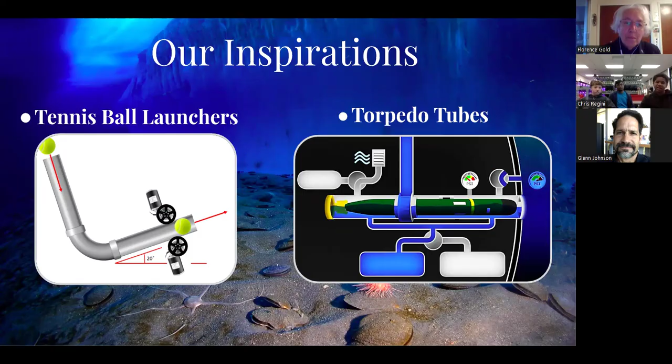Our inspiration is taken from tennis ball launchers and torpedoes, the way they launch out using wheels just to send it out and fly it out. Our first sketches were based on springs and airlock mechanisms, obviously based on the tubes of a torpedo. But we were quick to realize we couldn't use airlocks while in the spacecraft, so we had to brainstorm other ways of launching the can.

You already know the criteria, but just to sum it up, we have to launch the soup can off the edge of the table, and we can't exceed a certain speed.

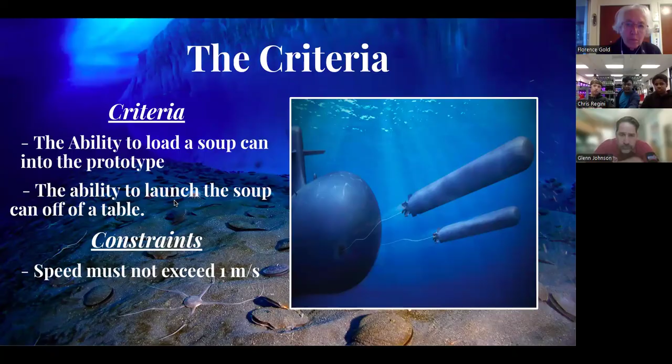All right, so the part you've all been waiting for, the pros and cons of our prototype. The best part is that we can launch it at a fairly regulated speed, not really exceeding 1 meter per second. And we're only using one motor for this, meaning power consumption will not be that high when we're using it. However, in the current state of our prototype, loading is not our best aspect. But as Nathan said earlier, a 3D part is currently being printed for our prototype, which will allow the loading mechanism to be more consistent.

Speaking of our 3D part, let me present it to you all in a CAD state. So this is meant to be a container which we can load the can from the top, we can activate our prototype, and it will launch from the side, as you can see here. The divots on the wheel on the side are meant to be holes so that the wheels, which you will see in a second, will end up launching.

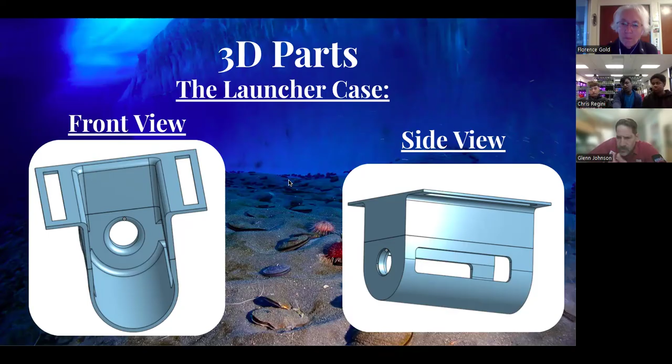So without further ado, I present our current prototype, which implements the inspirations of our torpedo tube and our tennis ball launchers into a method where we can launch our empty soup can off a table. And without further ado, here it is.

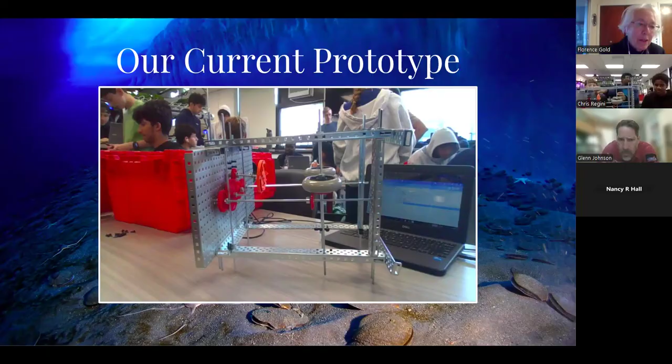Hi Nancy. Hey, so they're going to demonstrate their trash ejector. Got here just in time to see the demonstration. I had a phone call and couldn't get out of it. Not a problem, sit here. Okay, let me pin them so I can see it. Oh yeah, that's a good idea. Alright, show me what you think.

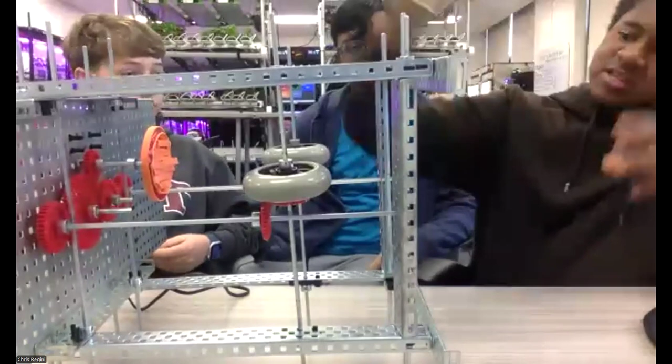How does this get loaded, gentlemen? So this will be loaded from the top down into here. Very good. And then we have a button at the back here. When we press it, it will activate these wheels and cause everything to start running.

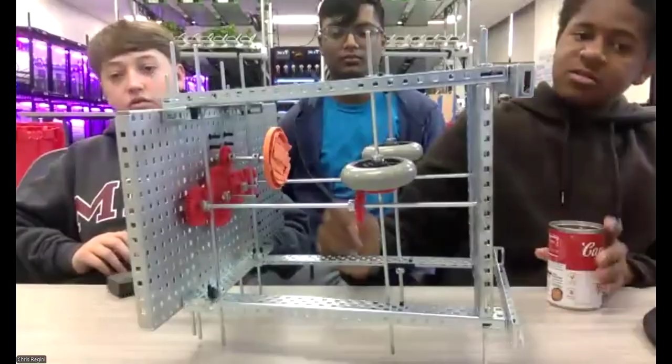So did I see that the pusher plate is rotating? Is that correct? Yes, the orange part is rotating. Very good. So when that rotates, look at that. So you guys are using one motor to spin the can as well as spin the wheels, is that correct? Yeah. Very smart. Okay, keep going.

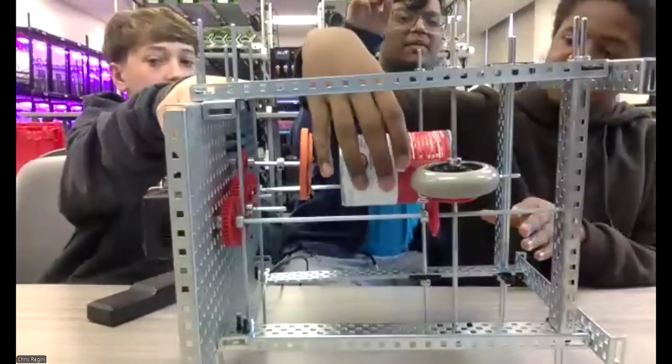Let me see it, can you throw it right now or not? Yes, we can. Oh excellent. Oh I see it, yeah, very good. It would be preloaded, but we have 3D parts being printed for that which isn't finished at the time of this presentation. That's fun. Nice.

Now, one question for you: does the spinning of the pusher plate give it any real rotational motion as it exits? Well, right now, because we don't have the holder to hold the can, it can't really serve a purpose. But once that's printed, it should allow the can to spin and launch out at the same time. I'm curious how that's going to work. Now, you know it's not required for it to spin, but I like that you're working on it.

Just as a thought, do you think there's any chance you could get any of that spin from the wheels themselves? I feel like that is possible, and it will definitely be hard for us. How do you think you would do it? I feel like the only way we would do that is we put the wheels on an angle. That's what I was thinking too. I see why it would be difficult for yours because you're trying to get all the motion from that one motor. But I like how you're doing this.

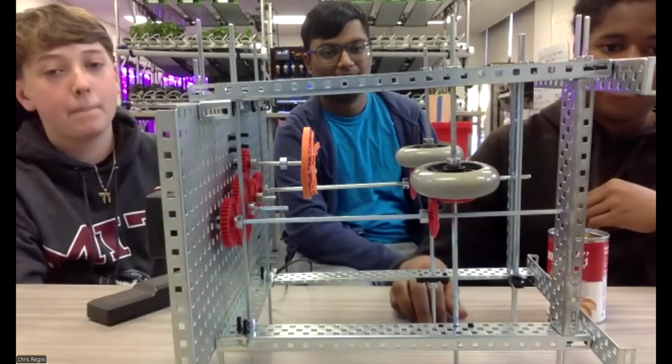I don't have any suggestions, but I think you guys are on a really good path. This looks great, team. So you're going to insert that 3D printed piece and reassemble around it. Are you going to have some kind of container on the outside for pressure, to keep from losing air? Our major focus at the moment isn't really the hatch, more so getting our can to launch, so we haven't really considered airlocks, hatches, that sort of stuff. Our main priority right now is just getting the can to launch. And I think that that's great.

Okay, that sounds terrific. I'm going to let Nancy ask some questions here. No, it looks real neat and stuff. I guess the one question I have is, since it's launching and following that curvature, do you guys have a way of measuring the distance that it travels?

You may be thinking to measure the distance it travels using a video and measure it. Yeah, because one of the things Glenn says is he doesn't want it to go more than one meter per second. So if you have a video - I told the other team you could put tape on the ground, see where it falls, calculate how long it travels, the distance, and then using simple math you can get the velocity it travels. So I definitely recommend you take video of it, so you can see how far it goes.

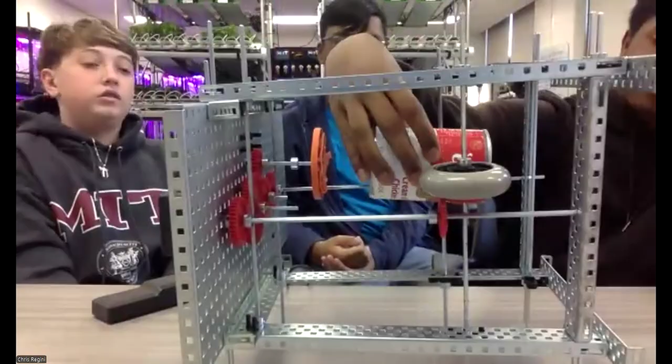Okay, another question for you. When the can is in there, how much are the wheels squeezing the can? We made it so that it doesn't squeeze too much so that it can't exit, but we also made it so that it can go a little bit outside and adapt.

Give it a 90-degree turn. Okay, so... oh, so we made it so that it goes in and out. Yeah, let me show it that way. Oh, very smart. I like how you've done that.

Part of what I was thinking about was that right now you're dealing with an empty can, and so I thought maybe it could be pinching the can, and that wouldn't be possible when it was full. But I think that you guys have it arranged in a way that's really smart.

Okay, I look forward to seeing how you do that exterior hatch. The fact that you guys already have some experience with gears and things like that, I think that's going to help you with deciding how you want that door to open, right? Because from inside, you can imagine, well, there's 3 different types of door, right? Here it is. So imagine I can have a door that opens like this.

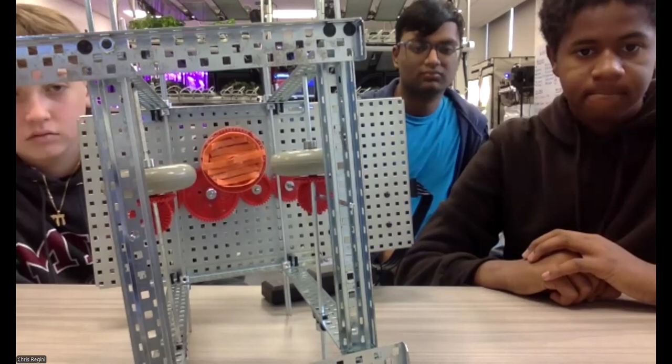I can have a door that opens like this, and I can have a door that opens this way, right? And so using some kind of gearing for each of those is not that complicated, especially if you've already got a handful of gears to play with. So consider, if you've got it like this, you're looking at a hinge. The pin for your hinge can become an axle for rotation. Does that make sense? So I think you guys have a lot of options with how you're doing this.

Excellent job, team. Thank you so much. Do you have any questions for us? Um, no, not precisely. Okay, what do you think your next step is?

I think our next step is to attach the loading mechanism and test it to make sure it's fully functional and doesn't cause any problems. And then next, we may just solve the opening the door mechanism, how to open the exterior door. I think that's a great process.

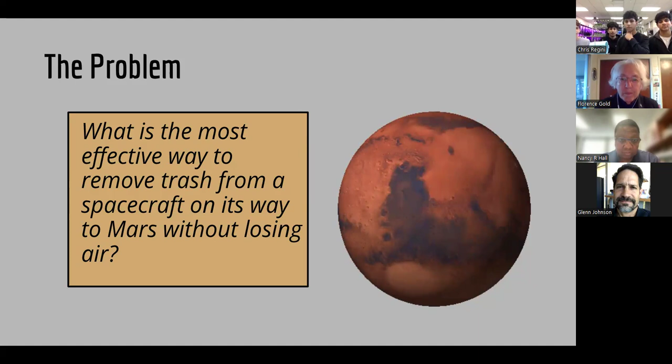We researched a little bit about football launchers and baseball launchers for inspiration on our tubule mechanism, where the wheels rotate in opposite directions to shoot our can.

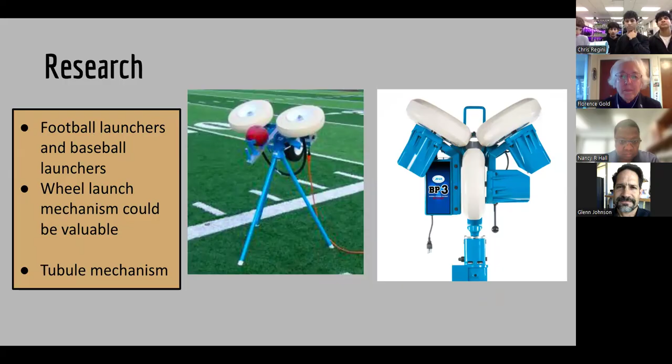Here's some primitive sketches we drew at the beginning of our project to brainstorm. We originally imagined a tube with a piston that would push the can into angled wheels for a spiral, and we wanted it to be fully automated, where it would just be a button press that activates everything in order.

We also had some other ideas, which we did not draw, which was a spring-loaded mechanism that would store potential energy and release it, and a piston-powered mechanism, which would be really fast.

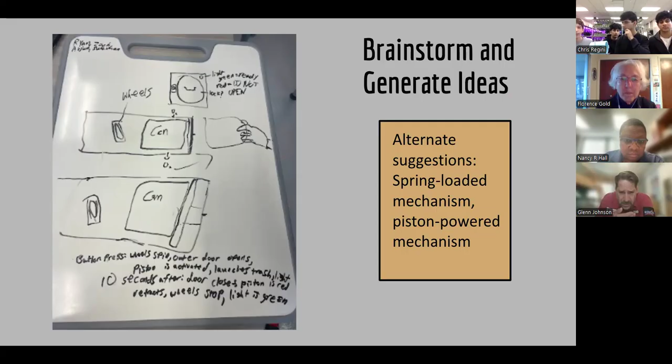Here's an additional sketch we drew showing how an astronaut would put the can into the tube and close the door. On the back of the door, we imagined a piston attached to a plate that would push the can into the tube, into the wheels. A problem we imagined was where we'd put the mechanism for the piston, because you don't want a lot of weight on the actual door itself that would make it unstable.

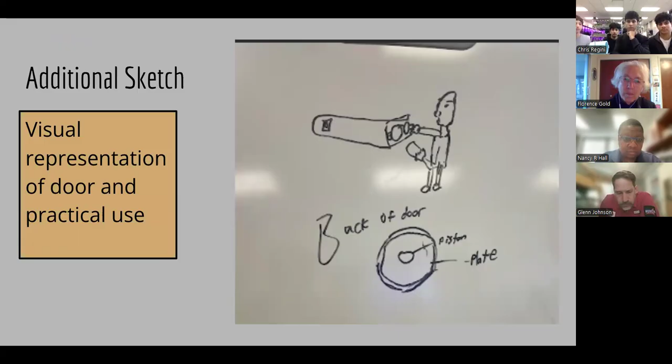Feel free also to use the cursor to point out parts in the picture if you want. So some of the criteria and constraints: the mechanism must not launch off faster than 1 meter per second to prevent denting, and the mechanism should be a simple design. The mechanism must have some kind of handle/release for the astronauts to be able to release the trash effectively, and the mechanism must be energy efficient, as energy is finite and valuable in space.

Some of the constraints are that the mechanism should not be complex and should not use too much material, as we were trying to make this as cheap as possible. And the mechanism cannot be heavy, because the heavier the mechanism, the more expensive it is to launch it to space.

Some of the designs and solutions we were thinking about: a spring-loaded mechanism due to the powerful launch. However, at the end, we determined this would be too fragile for our final project. We also looked at the wheel-powered mechanism, and we determined this would have a fast launch, which was better for our goals. However, this would be more complex, but with the way we built it as simple as possible. So our overall choice is to use the wheel-powered launch.

This is our current prototype. It's a 2-wheel mechanism, and each wheel is controlled by its own motor. The motor is connected to the wheel using a gearbox with a 3-to-1 gear ratio, in order to make the wheels spin a lot faster than the motor is actually spinning.

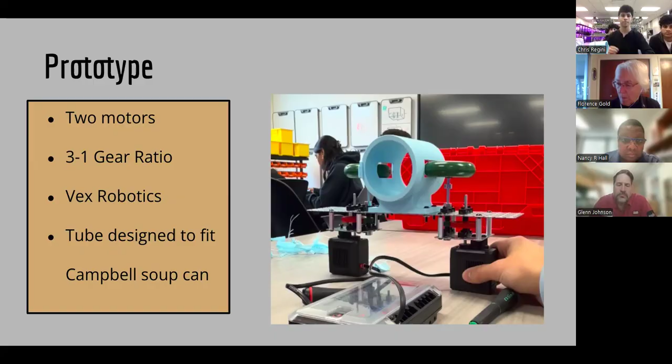This is the newer design we're working on implementing in the future. We will extend the tube, and we'll also have an L bracket connected to a drive shaft, which will be connected to a servo module. The servo module will spin the drive shaft, so the L bracket will revolve and push the can into the wheels to shoot it out. We're also working on developing some sort of a door, although we don't have much progress on that yet.

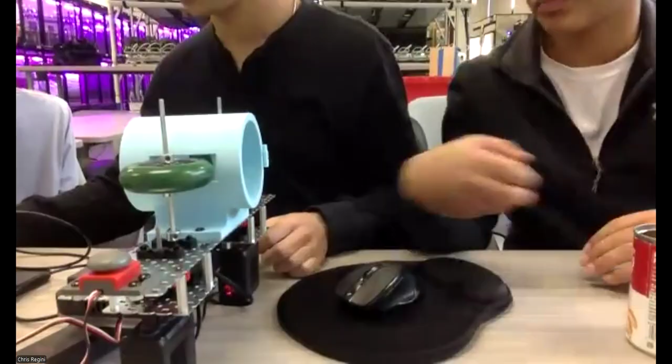The can would just be placed right in the tube, and the tube makes sure that the can is launched straight and direct. Our battery is over here, and our brain is right there.

We also have something that you didn't see on the slide deck. We added a button to turn the wheels on and off. I will show you how it works.

Whoa. Okay, that looks great.

Okay, now, I see that you've got two motors. I'm guessing you had to gear them down a little bit so they weren't spinning too fast. Is that right? Yeah, okay.

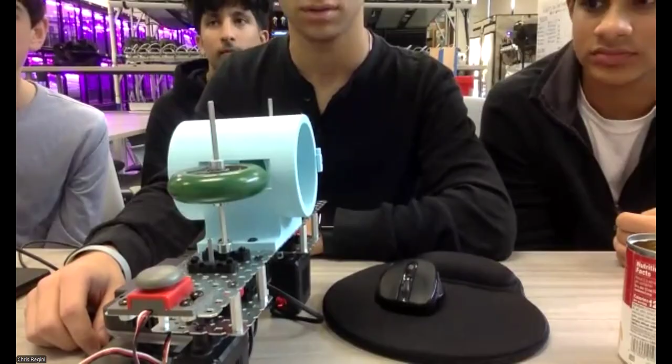What happens if one of the motors doesn't go, or isn't powered? Does it still go out pretty much the same, or not? Both of the wheels are spinning, and if one wheel stops spinning, the other wheel will spin in the same direction to launch the can out. So although it might launch with less power, it still will launch out.

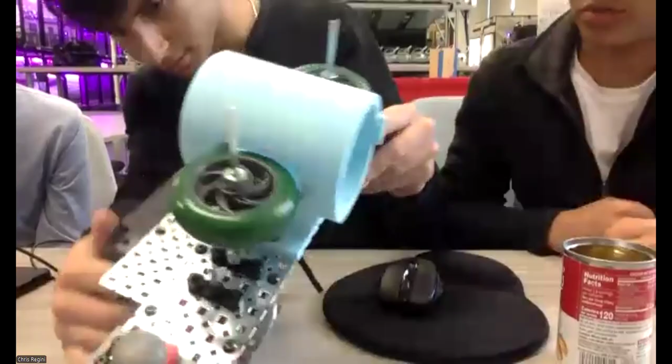So we're gonna unplug one and see how it works, because we've actually never tried it. It just won't go with as much pressure. Oh, it actually gets stuck. Does it jam? Yeah, it gets jammed.

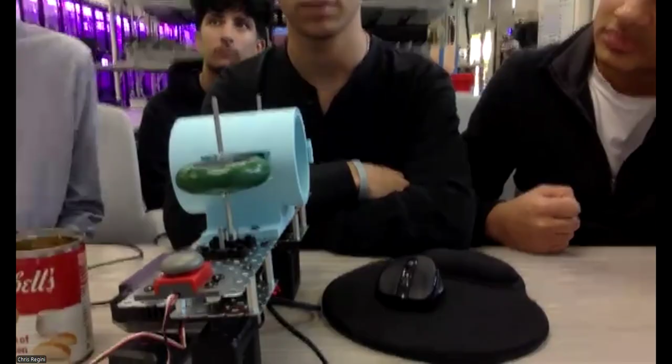Okay, now that's not all bad, it's something to think about, right? The other thing I was curious about is that by having two motors, it's possible that one could spin a little bit faster than the other. So that's something to think about. You might do a little experimentation to find out how that plays out, because it's hard to have two motors spinning at exactly the same rate—there are all kinds of little factors that could cause a difference.

Now, I also saw that you were planning for it to be a little bit longer of a tube. Can you explain a little more about how you were planning for that to happen?

So we're gonna 3D print the design. We're gonna extend this, but not include the holes for the wheels, obviously. And then we will include a smaller hole where the L bracket will go, that pushes the can into the wheels. It'll basically use some sort of adhesive to glue it or attach it here.

So I'm not sure I quite understand—you insert it, but how is it going to move forward to get into the wheels? You mentioned an L bracket, but I didn't see how that L bracket was getting its motion. I was wondering too, is that L bracket designed to move it?

It'll be connected to a servo module connected to the brain. So when you press the button, the servo module will spin, which spins the drive shaft right here, and then the bracket attached to the drive shaft will revolve around it, go into the tube, and push the can.

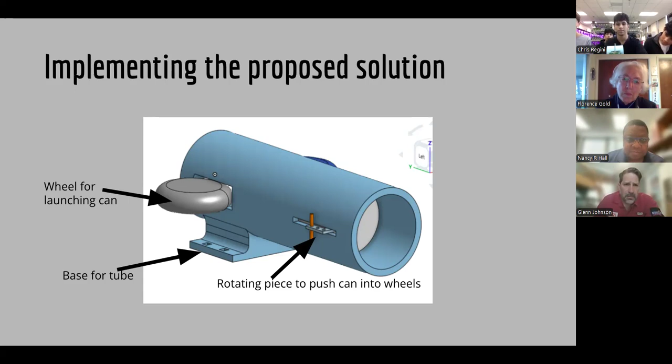Okay, I like your style with this. I think this is a great idea. Have you been thinking about your hatches, your hatch inside and your hatch outside yet? We haven't got so much into that, but we will work on that in the coming weeks.

Okay, so for example, I just got one big pipe here. So imagine you could have at least 3 different doors for this, right? You can have one that opens like a regular door at your house, one that rotates up, and one that slides open.

Part of what I'm thinking about is that when I was a kid, we didn't have automatic windows on our cars. You had hand cranks and you would crank it up and crank it down. Remember, you don't have to have electrical for everything. Some things you can do that same way. My reason for bringing this up is you may not have a whole bunch of motors to throw at this, but you can have a couple of hand cranks and some gears and things like that, and that'll keep it pretty simple.

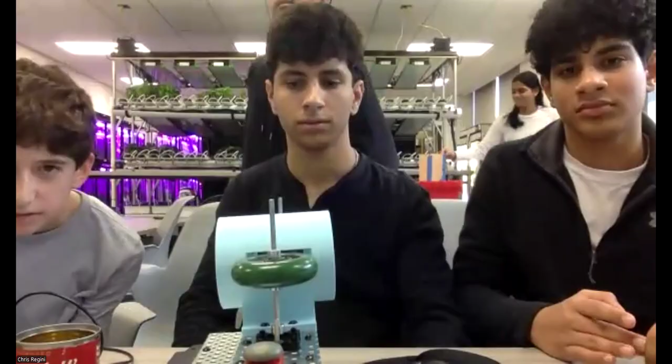You guys can take the can too. I'm just going to slide in and get stuff set up for you, girls, before we get going.

I appreciate you keeping us on schedule there. That's awesome. It's more about just making sure I get the kids over to where they got to go, you know? Yeah, that's good. Let's see here.

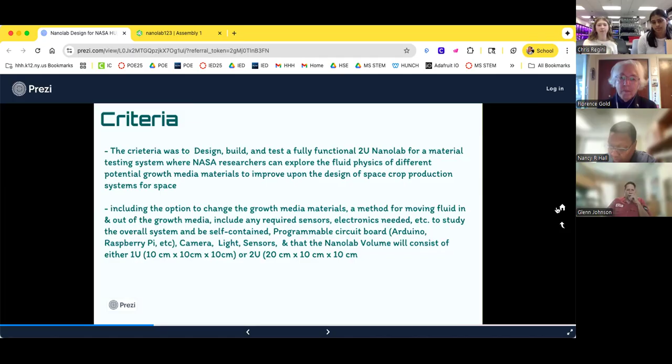So we did a lot of research. We found several existing commercial systems that address similar needs, including the passive orbital nutrient delivery system, the advanced plant habitat, veggie, and plant water management soil. These systems are currently used to deliver water and nutrients efficiently to growing media without conflicting with the challenges of a low-gravity environment. Having those sources to get inspiration from was really helpful.

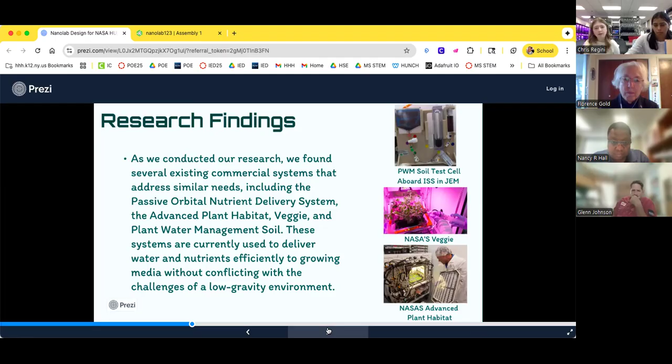Because our criteria prohibited any electrical or mechanical mechanisms, we had to ensure throughout our design process that the system required minimal manual labor while still allowing astronauts to efficiently grow crops in space. We did use sensors though, which come underneath the criteria for the mechanism we had to create, so it still went along with the criteria. We didn't have a problem implementing it into our solution without it going against the electrical or mechanical mechanism prohibition.

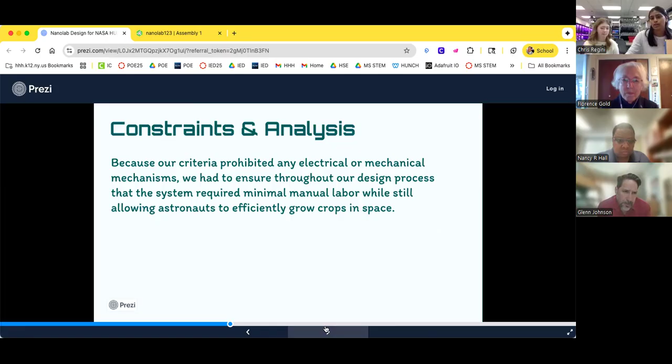Okay, so quick question, I want to jump in. Where does it say, because I didn't think it prohibited... when you say prohibited electrical mechanical systems, I'm just wondering what you're referring to.

So on the HUNCH website, they have the PowerPoint presentation for the Nanolab, and on it they encouraged avoiding electrical and mechanical engineering. So we implemented our solution to use as little to almost nothing for it, other than our sensors, which come down as a requirement.

Okay, all right, yeah, because I think it may have been minimized. I don't think it wants you limited, because you're right, the sensors are in fact mechanical and electrical systems. So if you minimize it, let me see what you've done. Yeah, I don't want you to eliminate it. I may look and see what it says, but that's a good question.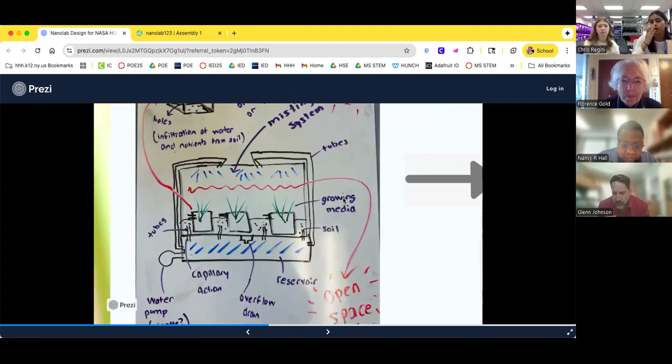Go ahead. So for our design, when we originally went into looking at it, this was our original design that we started off with. As you can see, we originally implemented our box to be horizontally implemented, and underneath it we'd have a water reservoir with tubes instead, but still using capillary action to get our water introduced to the growth media.

But our constraints were that we wanted to implement a misting system, but the misting system would require electrical engineering and mechanical engineering, which would take away from the system. Also, if we had to implement it with the water reservoir box, it would be used for the same purposes, and we wanted to completely eliminate the redundancy.

In our second mechanism, we wanted to implement a syringe instead, where we'd implement a little spring to push the syringe so that water would be introduced to the growing media at a slower rate for as long as needed in the experiment trial up in space. But our constraint was that if we put a spring in, there wouldn't be an initial push to allow that spring to expand, pushing down this area of the syringe to give the growing media the water it needs.

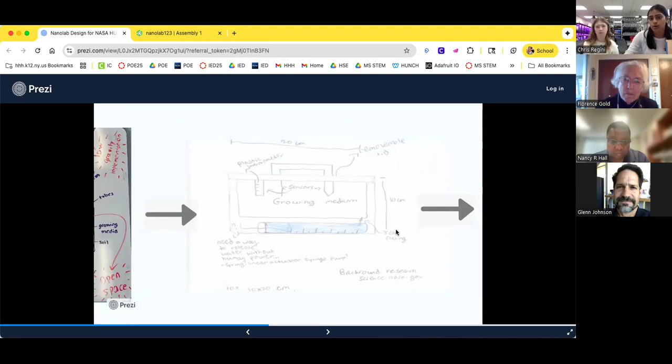So we removed that mechanism and moved on to this one, which goes back to our original design, where we still implement capillary action with our growing media box instead. We have the wicks from the wicking system at the bottom of our box into the growing media box itself to cause a puncture reaction, and that would start the capillary reaction from just that one mechanism.

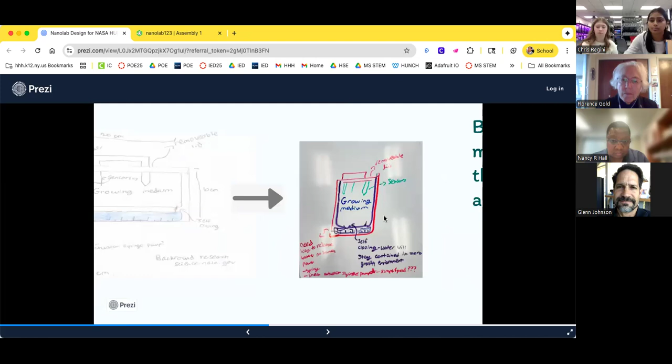So the entire solution would be that we have our little latch here that gets a key to move downwards, and then the growth media box itself would go down and puncture into our water reservoir from one initial push, where we'd have ridges on these rails on the side with springs that expand the second we remove when we push in the latch, causing it to go down.

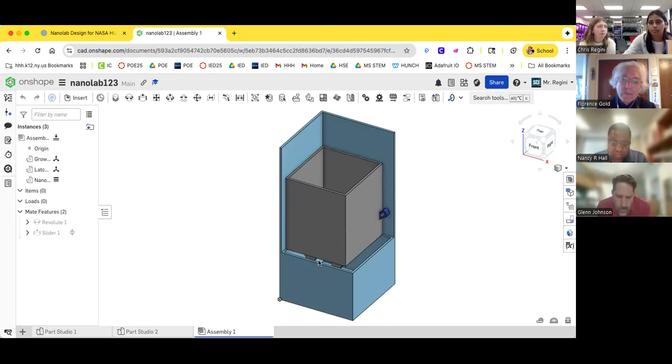So your idea with this is that before the drop, it's in this position, and just as you're about to drop, it comes in and it punctures. Is that correct? Yes. Okay, very smart, I like what you're doing, it's unique.

Okay, and I want to let you know I did go back and look, and there seems to be a little miscommunication. It does say no mechanical electrical, but it also says due to limited resources in space travel, the ideal water delivery system would be passive. That's not saying this has to be passive. So we're not telling you not to use that, because it specifically says we want you to have sensors, to be able to look and see what's happening with the plant's growth, like a camera or some system in there.

So this design is good, but if you find out you need to use mechanical electrical systems, because you're going to need some sort of camera to view this, you're going to need something mechanical in there. So you can use mechanical or electrical systems. All we're saying is for an ideal system, you want it to be passive, mainly because an electrical mechanical system breaks over time. So if it's passive, that's the ideal situation. So as you continue to design, if you need something mechanical, like that pushing mechanism, you can use that too.

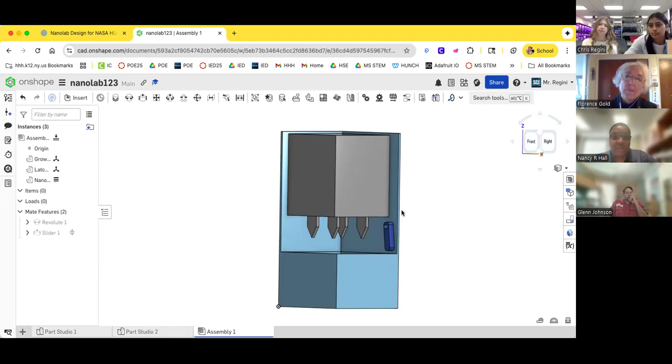Wait, Nancy, right now, I think yesterday you said that part of when we hook up the USB cable, that cable sends the signal saying we're going to drop. Yes, so that signal is what could send it into the water, correct? Yes. Okay, so what I'm saying is, if you set that switch rather than making it manual, you could use the electrical system so it gets a signal from the USB. There's Arduinos or Raspberry Pis or something you can attach to that, and once it gets a signal, that'll push it down.

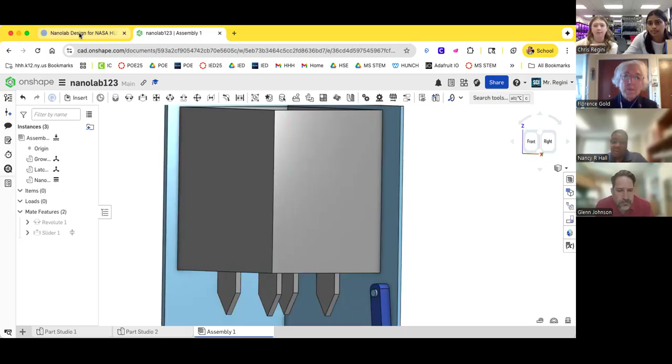We also just wanted to point out in our CAD design here, on the sides of our growth medium box, we did leave some room for when we implement the sensor, so that's why there's a little bit of extra space on this side. Okay, all right, yeah, no, I'm glad you thought of that. Yeah, and like I said, that was an ideal case, so yeah, no, that'll be perfect.

Okay, and then just remember the USB connection is on top, so the fact that you have your water and everything in the bottom is a good design. Thank you.

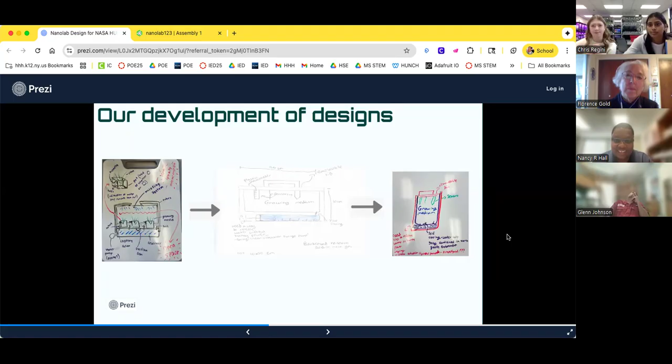Glenn, I see you're thinking about something. With your picture there, it makes sense—you've got a camera up top so you'll be able to see how water is moving into the soil or your medium material. I think that's really smart. How much water are you thinking to use for this?

In the actual presentation, they told us they would already have an amount that they'd have us put into our box, which is why we made it to only take up a certain portion, since the growing media box still needs space on top as well as room for the growing media to go upwards. We didn't focus on that as much in the design specs, but in our physical design we have it implemented.

Part of what I was thinking is that it's a 5-second drop, so having a lot of water is probably a bad idea. Yeah, you don't want a lot of water—you're probably talking somewhere around 20 milliliters. Is that a good guess, Nancy?

Yeah, because the thing is, you're not going to see it grow. Mainly what we're looking at is whether we see it puncture and the water start moving up. So this is one of those where you want to set it right as it's about to drop, because you'll be able to see it puncture and see the water move up from the capillary action. You won't see the plants grow, but you do want to test it in the lab and get an idea—that's something good for you to do.

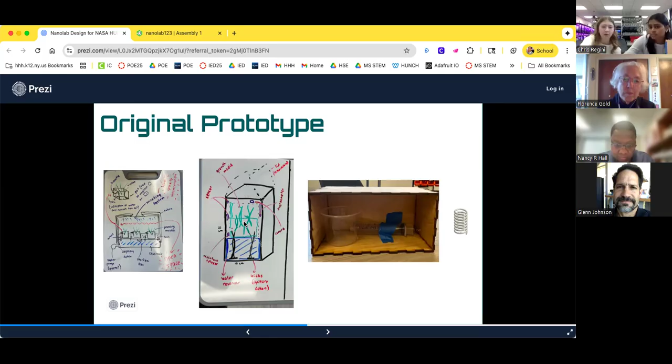So for the prototype models, if you see in the picture the red box here, this is our growth medium box. We originally put in a little divider so we could test two different types of grow medium at once. This is the sketch again, and this is the CAD file you guys saw already. This is also the wicking material, implemented at the bottom of our growth media box, to cause the puncture into the water reservoir box.

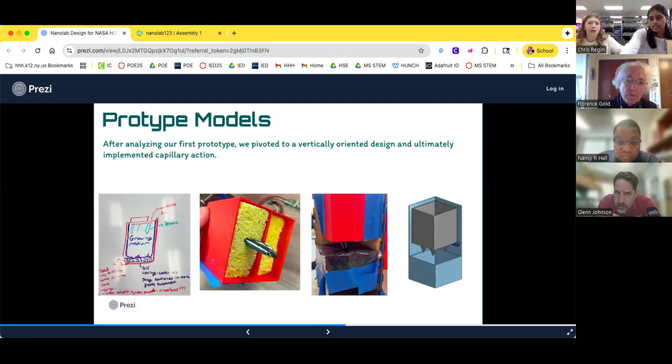You can show them that when you go live. This was our 3D CAD design, where we have our water reservoir here. Above the water reservoir, on top of the box, we have a thin film we're currently creating to cause that puncture, where the wicking material goes down and punctures into this material, giving it access to the water and introducing it into the growth media through capillary action. The wicking material is the thin cotton-like material that punctures in and stimulates that capillary action.

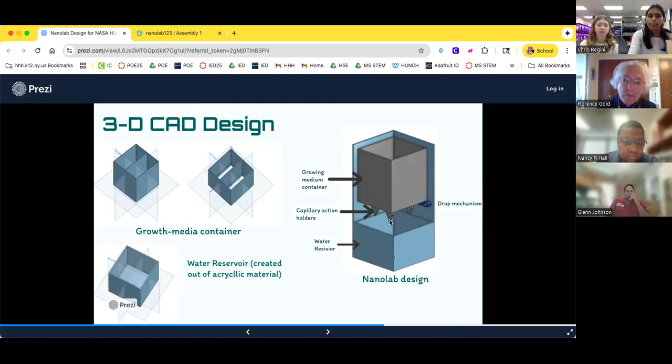So we did the growth medium test as we stated before. We used the MV1 units and tested out 4 different types of growing medium: sponge, one type of soil we used which was the arcillite, and then the perlite vermiculite blend. The arcillite was lightweight and very absorbent, and the perlite vermiculite blend was the one we chose to be the lightweight version.

This is the growing media that we tested, which is what Katie was talking about. We tested out these 4 different types of growing medium, and we grew alfalfa for its quick results. We do plan on conducting more tests in the MV1 to test out more different types of plants and continuing with our research on that too.

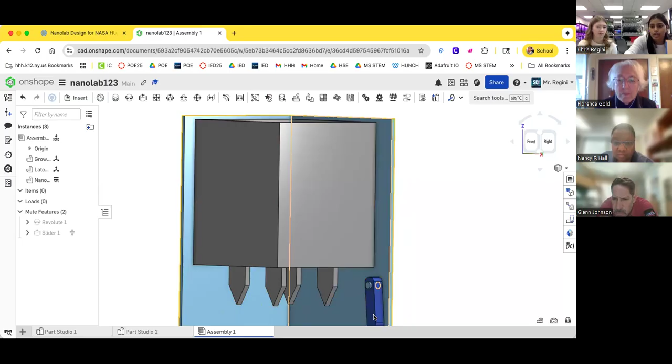For our next steps, the few implementations we are trying to push into right now and focus on before going to CDR is the implementation of our twist latch, which is this implementation where we have to work on finding or creating a key so that it can mechanically be pushed downwards. We're also working on implementing the thermometer, the humidity sensor, and our camera in the space that we were showing you before.

One of our peers has been working on a crane for the zero-G for conducting additional tests in the MV1s, to be able to put a petri dish with our growing media inside to see how it responds to this zero gravity environment.

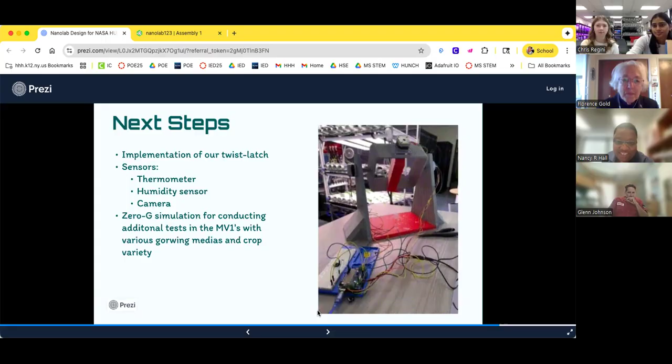That's a neat device to use. Yeah, that's very cool. Wow, that's very good. Like I said, you had me a little concerned at the beginning when you said no electrical, mechanical, because I'm like, where did I write that? But I'm glad you guys are looking at sensors and all that. So yeah, that looks real nice.

Humidity sensor, moisture sensor. So is that a capacitive moisture sensor? Is that right? Yes. Very good, keep going. The Raspberry Pi that we have implemented in our box is in the space where we could implement it against either our growing media box or near it.

This part is on its own, where it would be upside down in our growing media box, already implemented there with this material. And what is the red part of the box made of? This is the acrylic material, and this is the 3D print material that we used.

We then plan on redoing or reprinting this, because as you can see, we originally were going to use the sponge, but after our test we found that the soil works better. The reason I say that is with the electronics, putting them at the side is good, but make sure it's not going to be in contact with the soil and the water. That's the one thing you want to make sure of.

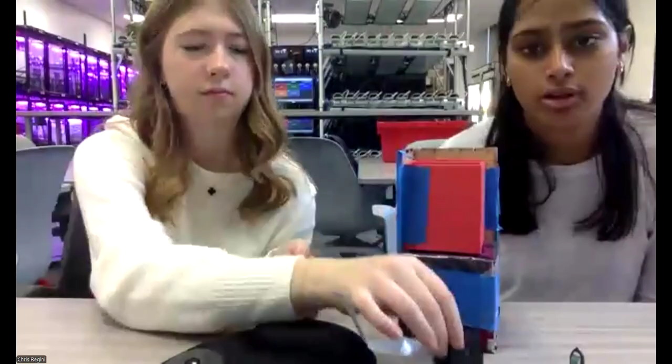We could implement it at the top to be able to look down at the growing media. Just a thought. You might have one light up top, and then since you're going to have a transparent box, you might put another one down low, or a couple down low, and that way you get transmission light as well as reflective. Does that make sense?

With the light, you can also get a little strip to light it, because this is going to be enclosed and covered, so you want to test it enclosed and see how well the light works. And making it clear is actually a good idea, that way you can see it.

Another thought: you might add food coloring to your water. By having darker water come in, you might be able to see more of it as it gets absorbed into your soil, and choosing the right color might be valuable.

Anyways, I like what you're doing. The thing that impresses me most is that you want to set it up in the drop tower, but you don't want water to make contact until you're getting to that 0G position. I think that's a really critical component for this experiment.

Very nice, very good job. It's very unique that you're punching holes, that's really cool, and you wrap the wicking. You might want to also try different types of wicking, not just cotton. There are other materials that might do a little better job. I don't know, try it.